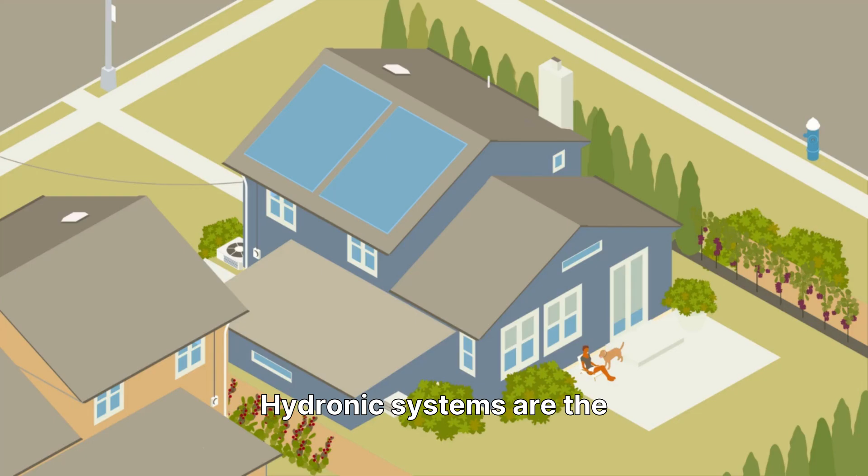Hydronic systems are the backbone of modern heating and cooling design, moving heat efficiently and economically using liquid, most often water. Think of a hydronic system as a heat transfer machine, carrying heat into or out of a space according to the building's demand and your chosen control settings.

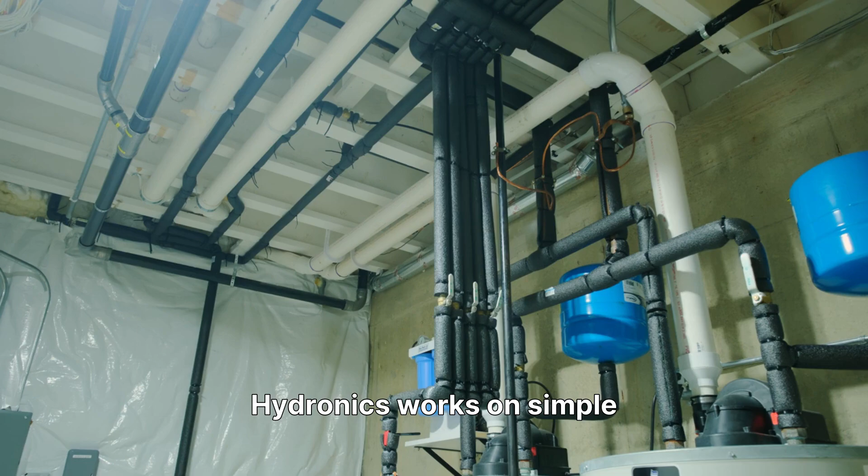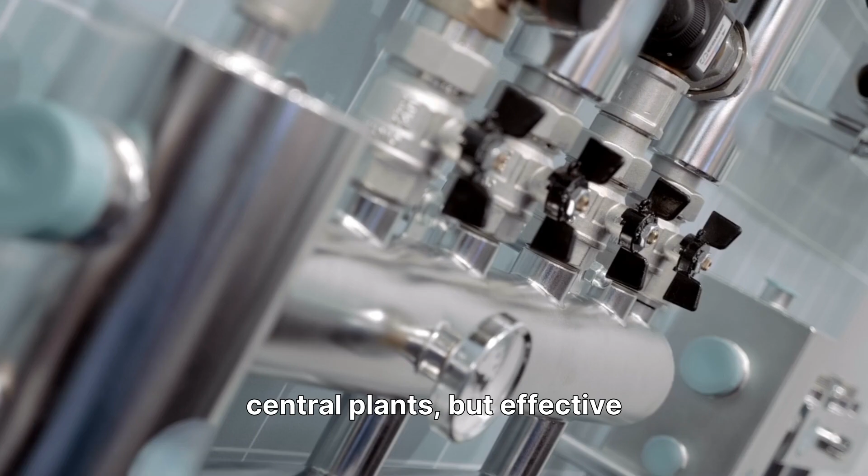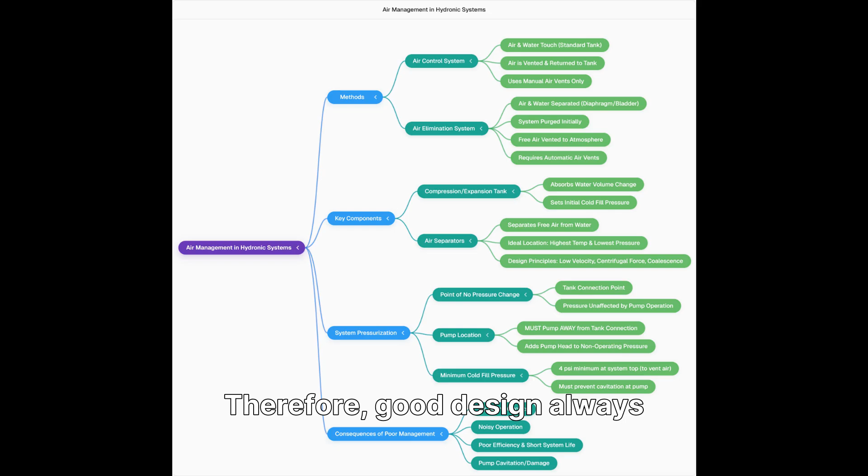Hydronics works on simple physics. When water absorbs heat, it expands and carries that energy through pipes to coils, radiators, or other heat exchange surfaces. Designers create reliable systems for single-family homes or central plants, but effective air management is crucial for optimal performance. Without proper air management, air pockets can form inside pipes, leading to noisy operation, unbalanced flow, poor efficiency, and even shortened system life. Therefore, good design always begins with controlling and eliminating air to ensure smooth and silent operation.

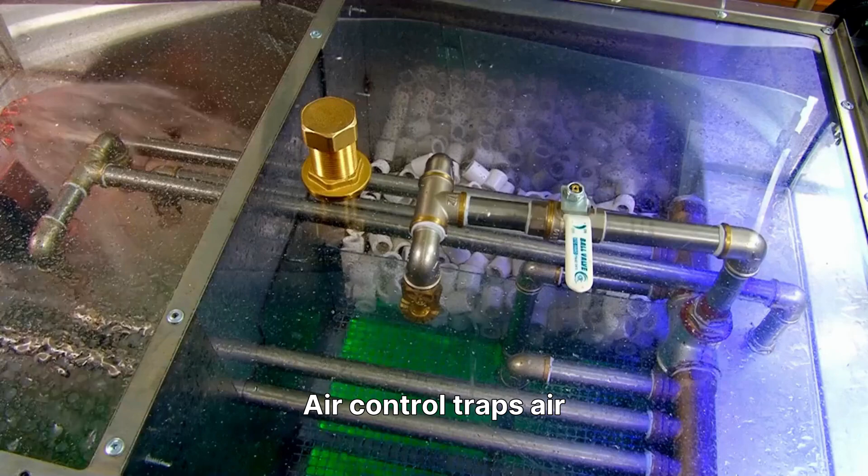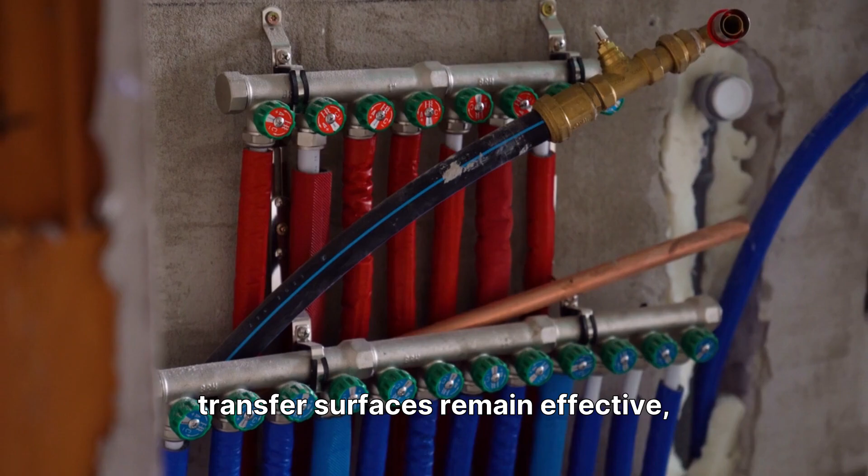Closed systems utilize two main strategies for air management: air control and air elimination. Air control traps air and routes it to a high point for venting, while air elimination uses air separators and automatic vents for continuous removal. These techniques ensure water circulates fully and heat transfer surfaces remain effective, preventing issues like noise and reduced output.

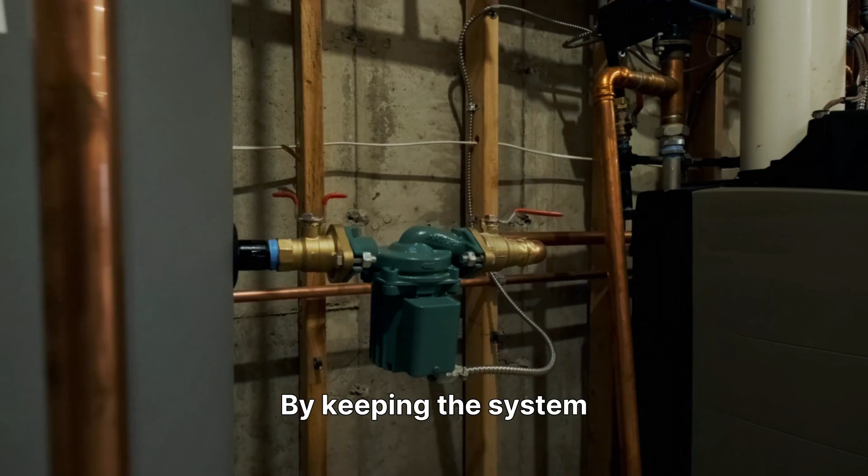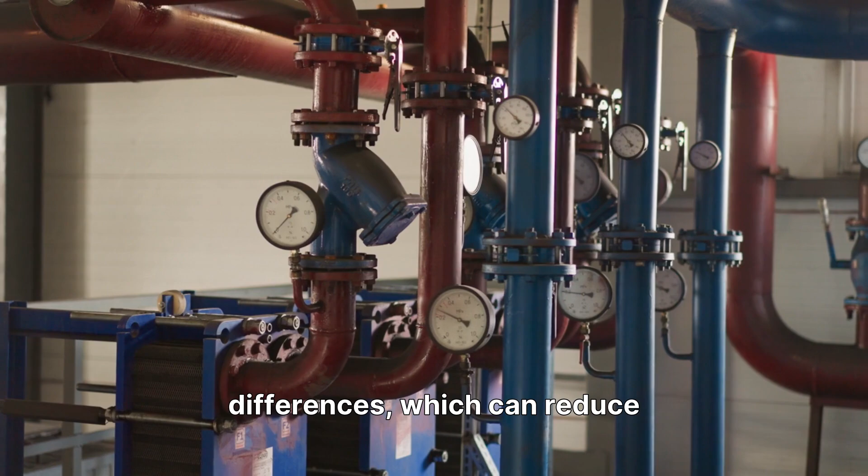A closed hydronic system is completely sealed, minimizing the need for makeup water, which is crucial because new water introduces oxygen that causes corrosion. By keeping the system sealed and pressurized, you dramatically extend its service life and gain performance benefits. Pressurization allows higher operating temperatures and greater temperature differences, which can reduce both pipe size and pumping costs.

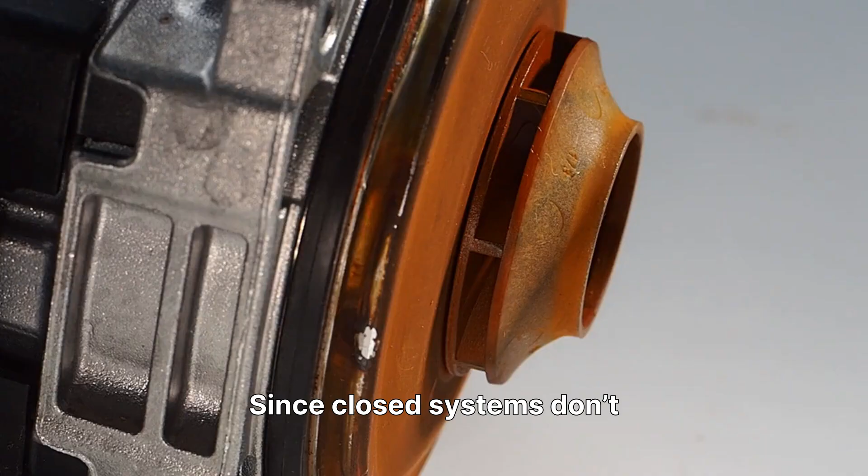The pressure in the system is managed by a compression tank, which absorbs water expansion as the temperature rises. Since closed systems don't leak by design, circulating pumps use mechanical seals instead of old-style packing glands that rely on leakage.

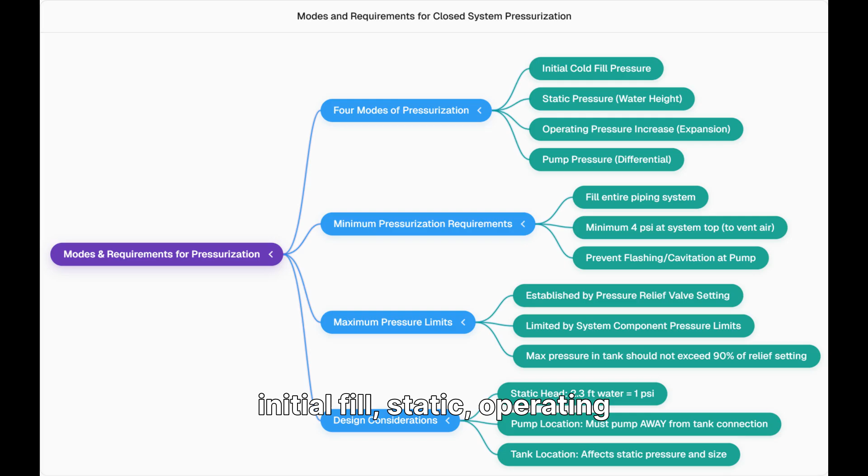There are 4 types of pressure you'll encounter in a hydronic loop: initial fill, static, operating pressure increase, and pump pressure. Initial fill pressure is the cold fill that ensures water reaches the highest point of the system, with at least 4 psi at the top.

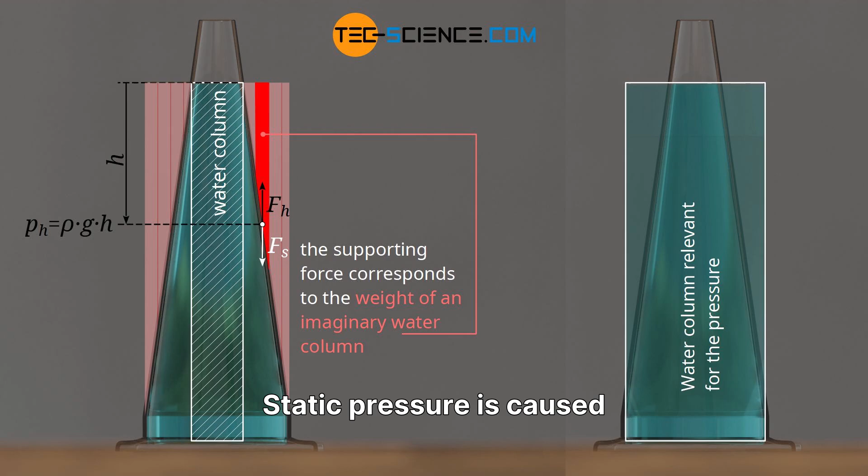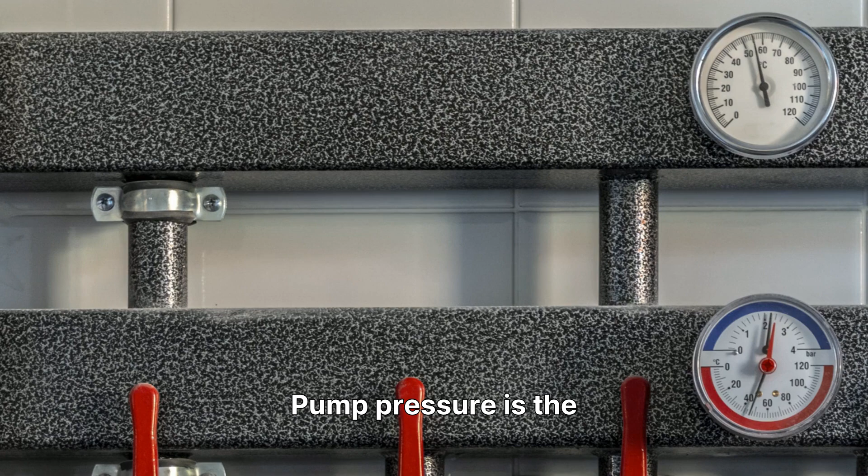Static pressure is caused by the vertical height of the water column. Roughly every 2.3 feet of height equals 1 psi. Operating pressure increase is created when the water expands and compresses the air in the tank. Pump pressure is the differential created by the circulating pump itself, driving the flow.

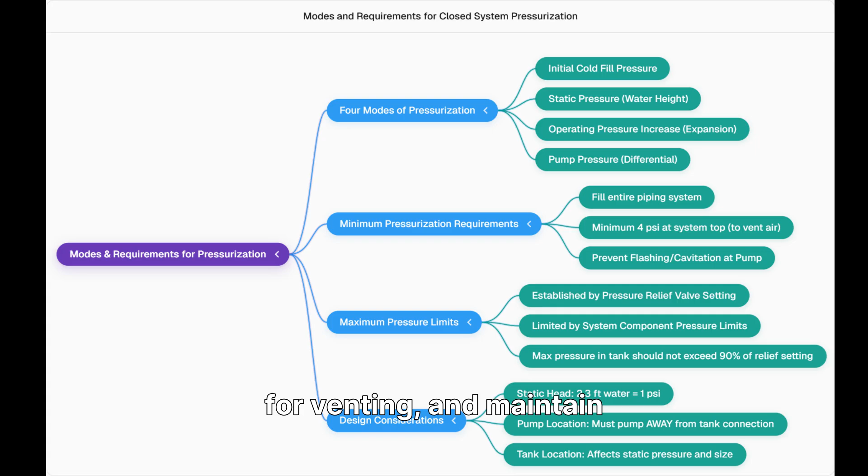When filling the system, 3 goals matter: fill it completely, provide that minimum 4 psi at the top for venting, and maintain pressure above the vapor pressure of water to prevent cavitation.

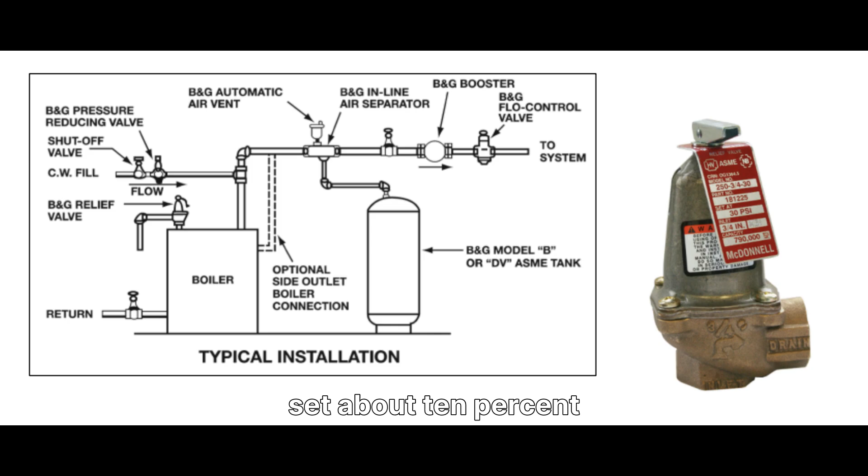Since water can't be compressed, we use a compression tank to absorb expansion. The tank size depends on the system's total water volume, the temperature rise, and the chosen pressure range. The relief valve setting limits how high the pressure can go, often set about 10% below that to avoid nuisance discharges. For standard tanks, volume is calculated using Boyle's law, considering initial and final pressures and expected water expansion.

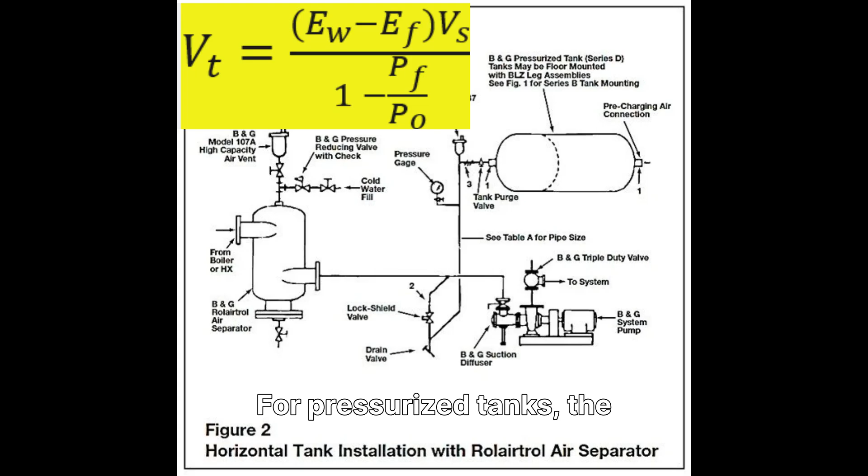For pressurized tanks, the math is simplified because the air cushion is pre-charged to the fill pressure. The tank's acceptance volume, the portion that actually compresses, must be large enough to hold the system's net expansion. If glycol is used, remember to increase the tank size because glycol expands more than water.

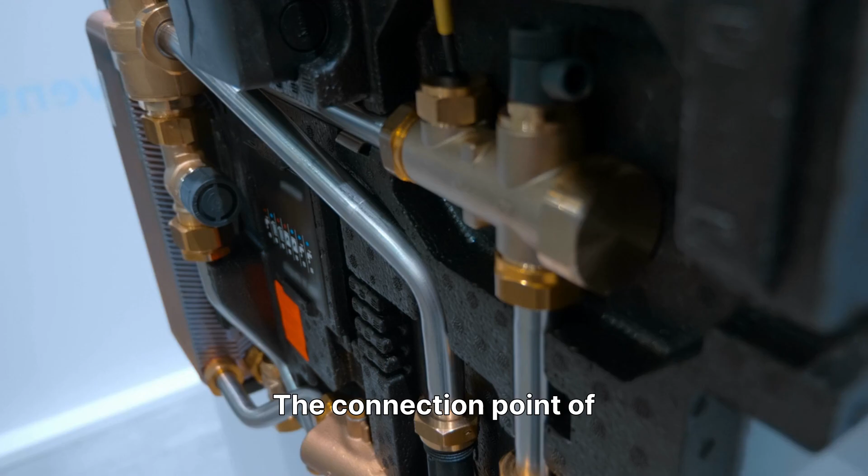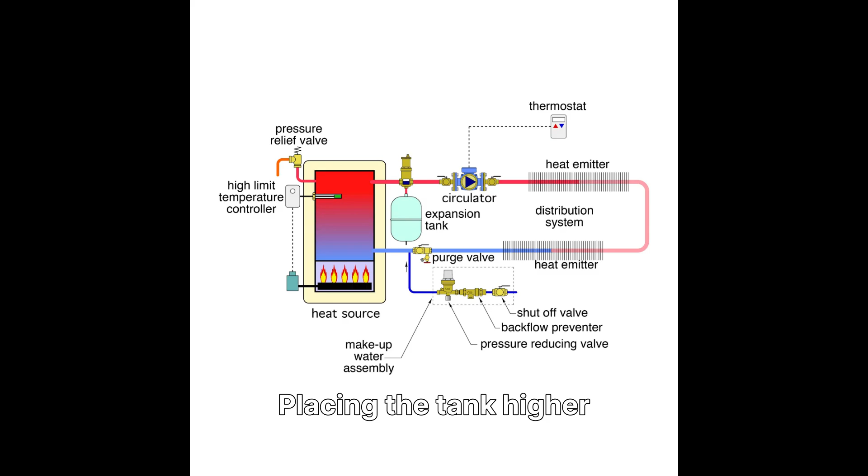The connection point of the tank defines the point of no pressure change, where pressure remains constant regardless of the pump's operation. That's why the tank is often connected on the suction side of the main system pump. Placing the tank higher can reduce the required static fill pressure, slightly reducing the tank's required size.

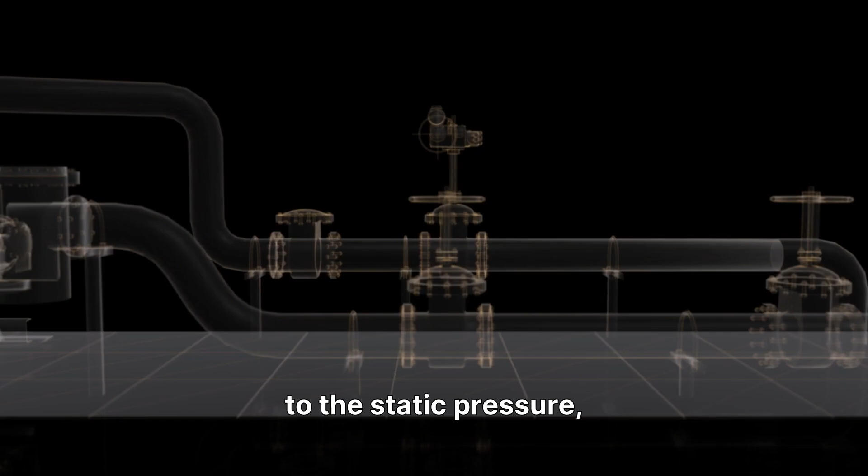Here's the golden rule of hydronic design: always pump away from the point of no pressure change. When you pump away from the tank, the pump adds its head to the static pressure, keeping all parts of the system under positive pressure. That prevents cavitation, eliminates air draw-in, and keeps flow stable, ensuring system longevity.

If you pump into the tank instead, the suction pressure drops, and you can actually pull a vacuum on the return line. That can cause the water to flash to steam or suck air through automatic vents, both serious problems. So, the correct practice is clear: always pump away from the expansion tank connection.

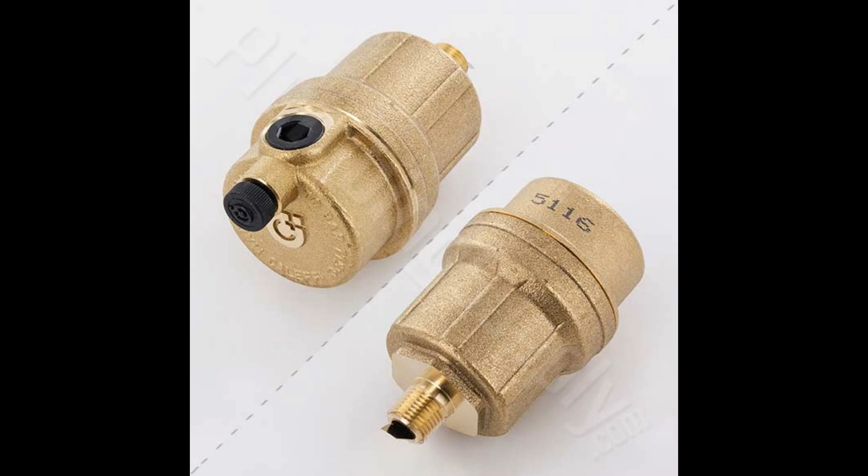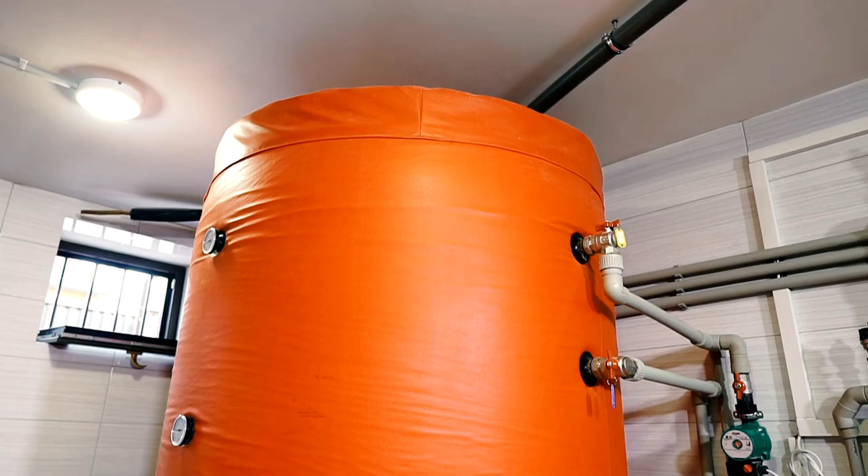Let's review. Hydronic systems use water to carry heat efficiently and economically. Effective air elimination keeps the system quiet, stable, and long-lasting. Closed-loop pressurization prevents corrosion and allows higher operating temperatures. Maintain at least 4 psi at the highest point during filling. Correctly size and locate the expansion tank to handle expansion safely. And always, pump away from the point of no pressure change. When these fundamentals are followed, a hydronic system becomes a smooth, silent, and reliable energy transfer network that will perform for decades.